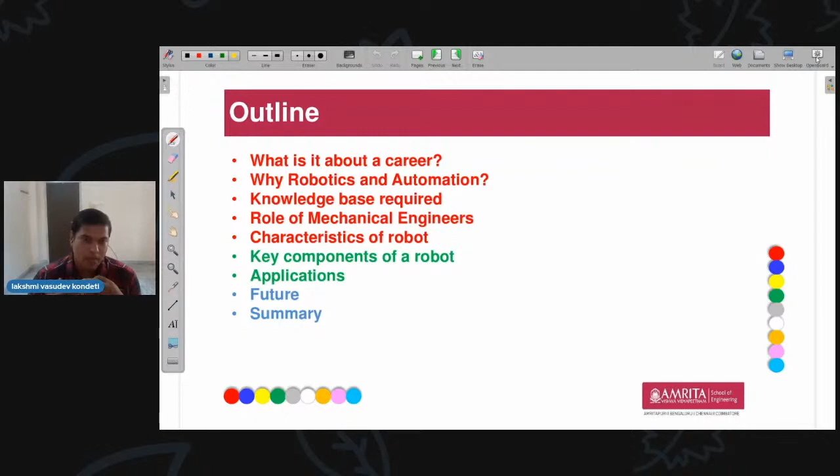So let me outline my presentation for today. I will be talking about what is it about a career, why robotics and automation, knowledge base required for robotics and automation, what is the role of mechanical engineers in this field, followed by the characteristics and some technicalities of robots and their components and applications, etc.

So let me start. What is it about a career? This might be the question for many of you after you finish your 10+2. Career is nothing but the place where you are going to spend 50,000 hours of your life on an average, and the best 20+ years of where things happen for you. So you have to be very careful in choosing your career. The 4 years course or 5 years course, whichever you are preferring at this point of time in your life, will decide the course of your life for the rest of the 20 plus years.

So where you spend during the training also decides it, so you have to be careful in choosing your institutes as well as your courses. Let me start with why automation and robotics is important and why we have to consider this right now. We call this the age of automation, and there are 7 parameters I would like to explain to show why this age of automation is important and why you should consider robotics and automation as one of your career opportunities.

The first thing is the share of jobs with a high potential of automation. If you consider transportation and storage, manufacturing, and wholesale and retail trade, by 2037 there will be a 50% hike of automation happening across these spheres, since there are repetitive jobs that can be automated. By 2037, you will see a sharp change in that field.

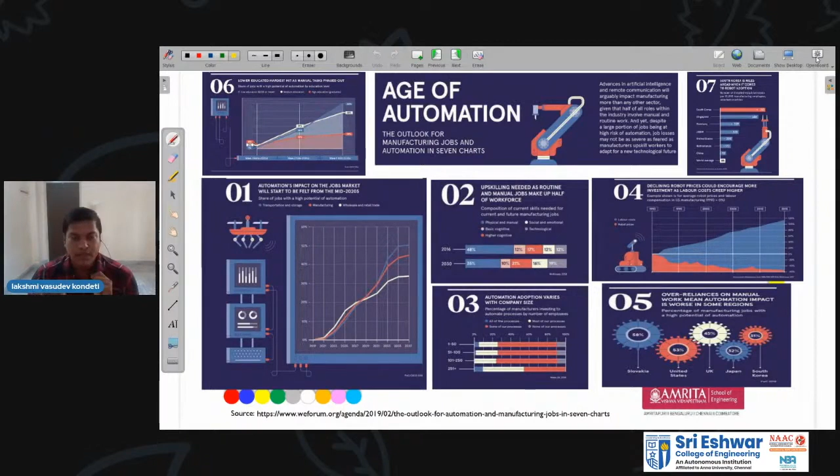So share of jobs with high potential of automation by education level: low level education in 2020 is at 1%, then by 2030 it is going to be around 60%. So low level education people have to upskill their knowledge and improve so that they are in the process of adapting to automation, which is very important by 2030.

Similarly, for medium scale education, it is going to be at 45%, and for high education people it is around 20%. So if you see the implementation of robots in the manufacturing sphere country-wise, for every 10,000 employees, South Korea has already implemented 710 robots.

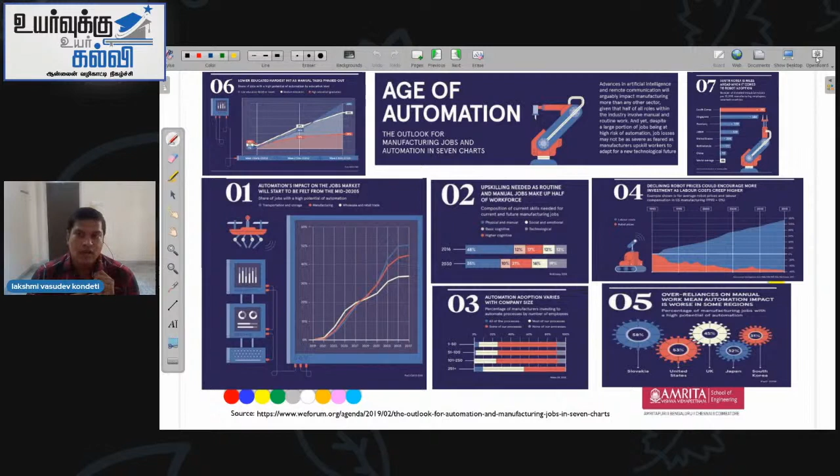Singapore is at 680, approximately Germany is at 380, Japan is at 300, United States at 200, and so on.

So now it is very understandable from these 7 charts. What I would like to communicate is that you are in an age of automation and you have to upskill your talents, and the newer generation needs to look for a better automation and robotics sphere of excellence.

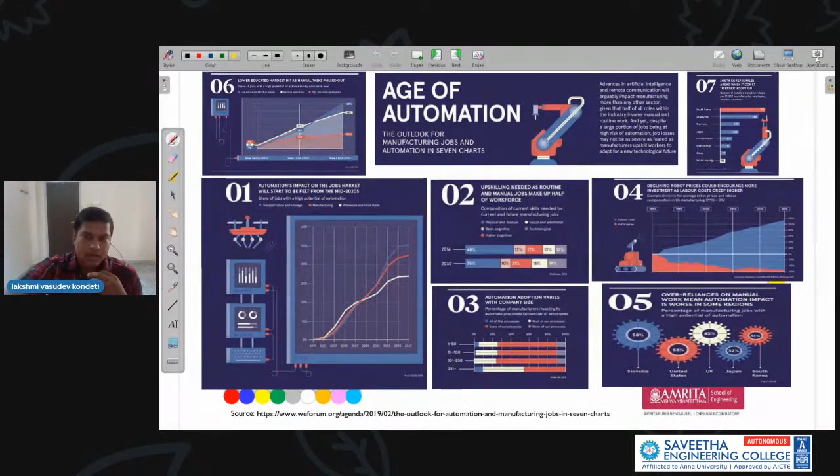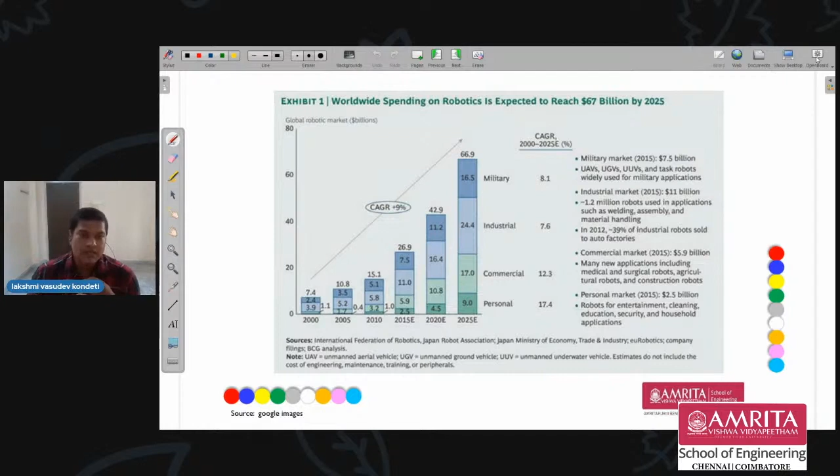If you see the worldwide spending on robotics from 2000 to 2025, the increase is very drastic. The compound annual growth rate from 2000 is at 7.4 billion spending on robotics, whereas in 2025 it is going to be 67 billion, across fields like military, industrial, commercial, and personal.

This commercial and personal aspect is very interesting for us. Why? Because in 2000, no one thought these things could come up. But this COVID pandemic situation has made us understand the need for this type of automation, so that people will not gather too much.

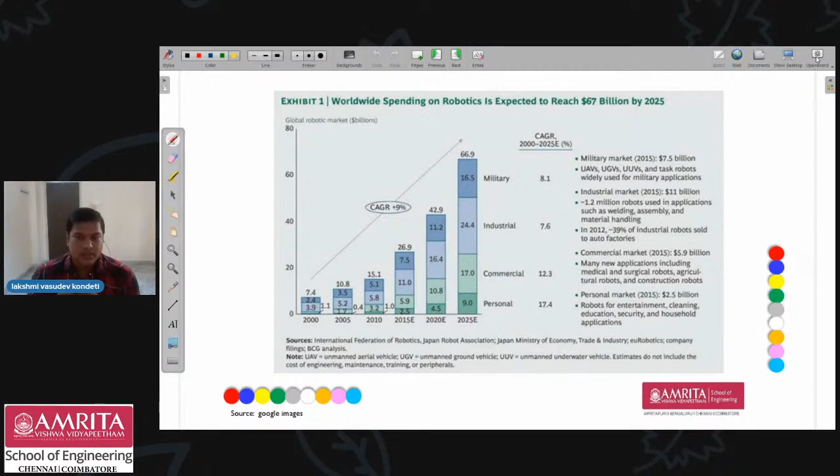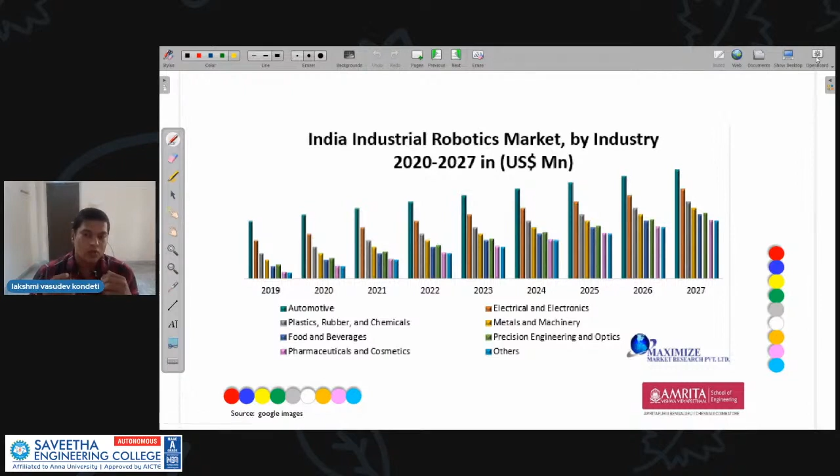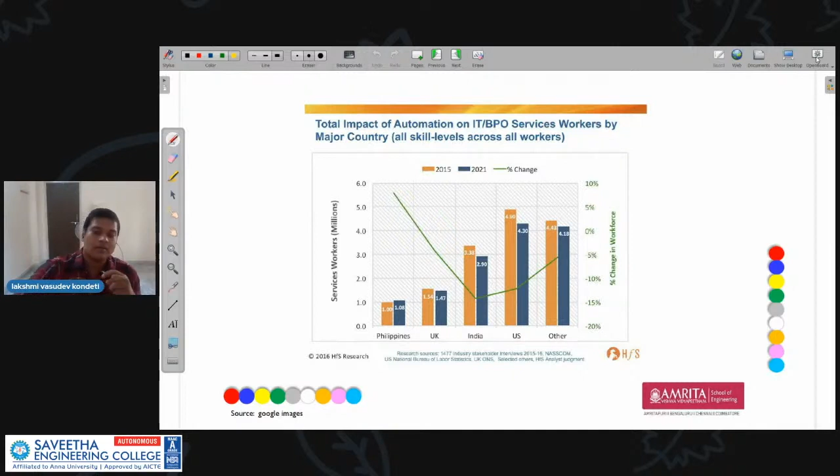Having said that, it is very understandable and very important for us right now to understand that we are in a position, a situation where automation is inevitable, and we need to be ready for that and skilled in that direction.

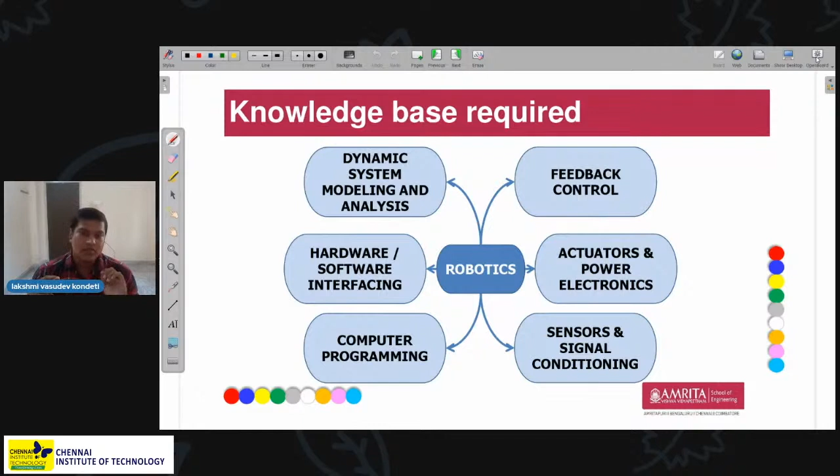So what is the knowledge base required for robotics and automation? Basically the person requires dynamic systems modeling and analysis, feedback control systems - how to control these machines is also very important. Actuators and power electronics, which requires - those are the muscles for the robots. That's one interesting field where electronics comes into picture. Sensors and signal conditioning, computer programming, hardware-software interfacing - all these areas one should be very familiar with in the upcoming years.

So what is the role of mechanical engineer? The role of mechanical engineer covers design of robot structures, joint mechanisms, bearings, heat transfer characteristics, locomotion - all these things are required to be designed, and that design can be done by mechanical engineers. Hence, it is very important that the mechanical engineering sphere is not going to wave off in this.

So for maintenance, even if designing of robots is too much, at least the maintenance part of the robots requires these skills, and hence that particular direction needs to be highly emphasized.

You need to take a course like a 4-year mechanical engineering degree, which is very much essential at this point of time. Robotics mechanical engineers must have a complex understanding of math, science, mechanics, manufacturing materials, and mechatronics. This makes them highly in demand for possessing multidisciplinary skills, because mechanics and mechatronics are completely different disciplines where you need some exposure. Hence you will be in a position if you choose 4-year mechanical engineering as your career.

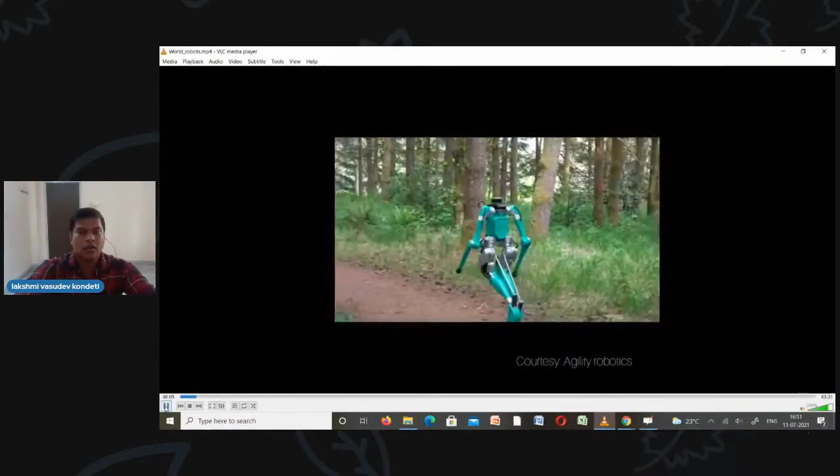Before proceeding further, I just want to show you the current trends of robots. Let me play this video for you. I hope it is visible.

Sir, sorry for the interruption. Dr. Vasudev, your voice is breaking, participants are unable to hear you, sir. I think you need to hold it and constantly hold and talk. Okay, okay ma'am, sure, sure. If you leave it, your voice is breaking, they are unable to hear anything. Please. Okay, thank you, sir. Thank you, ma'am, thank you very much.

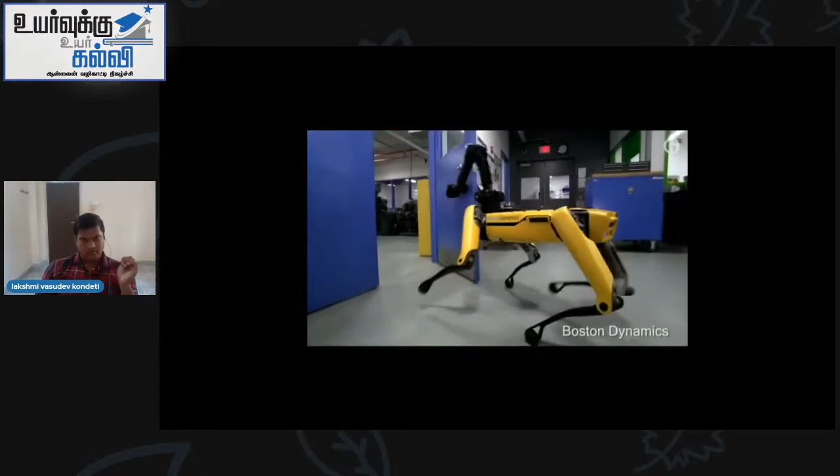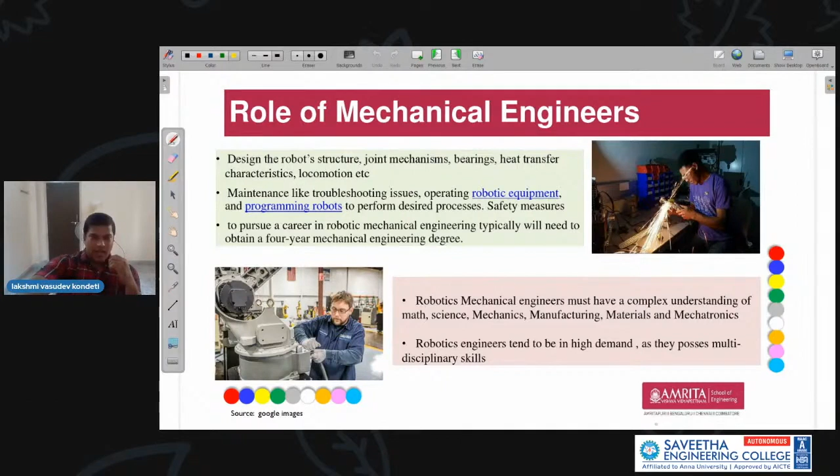It's terrifying, it's terrifying to see that they are even coordinating with each other in the last part of the video. So these are all smart robots which are helping the humans in one or the other way.

Let me go into small details of robots so that you can understand. The robot always needs to sense, needs to move, and needs energy to consume. To use all these things in an optimum way, it needs some intelligence.

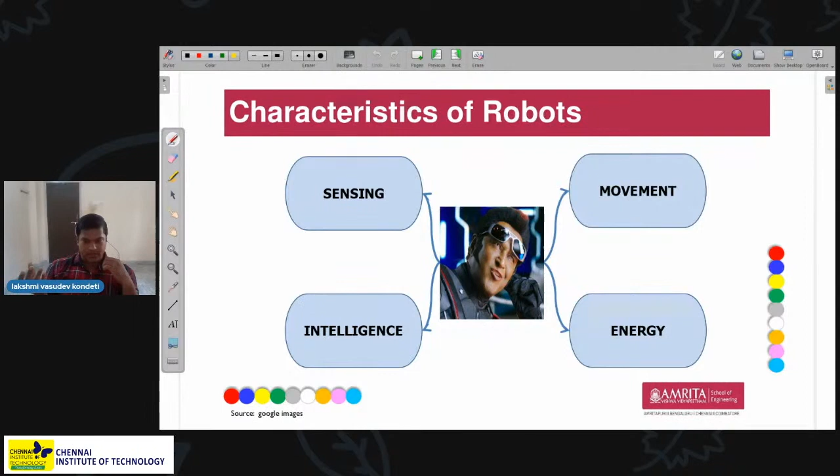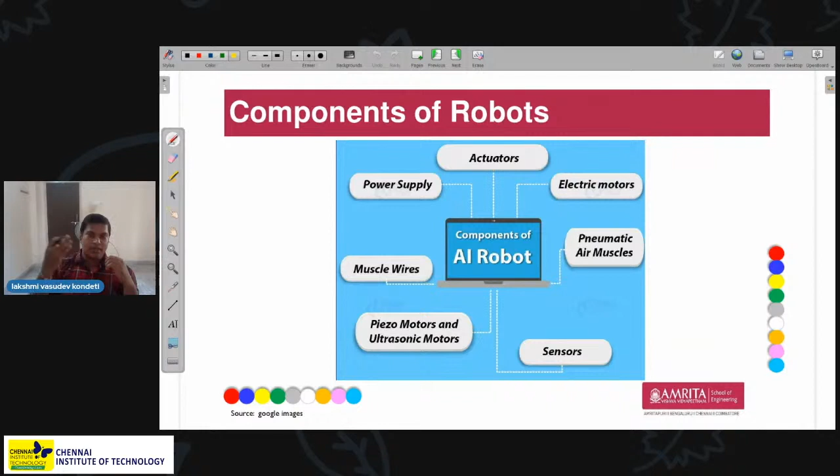So the components of robots are: it is a machine with actuators, electric motors, pneumatic air muscles, sensors, and a power supply unit. And for intelligence, it needs some interfacing with hardware and software.

If you want to differentiate in a very basic manner, we can widely differentiate robots into two categories. One is the fixed one, which cannot move from one location to another; its base is fixed. Whereas the other one is mobile, it can use wheels or legs to move from one location to another.

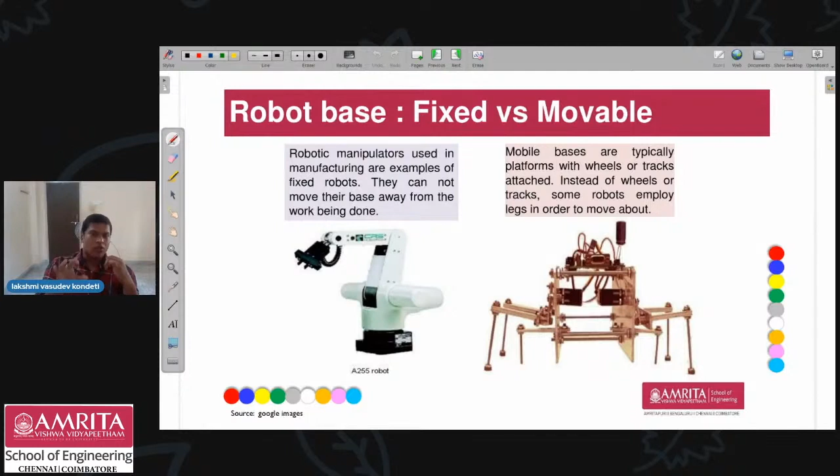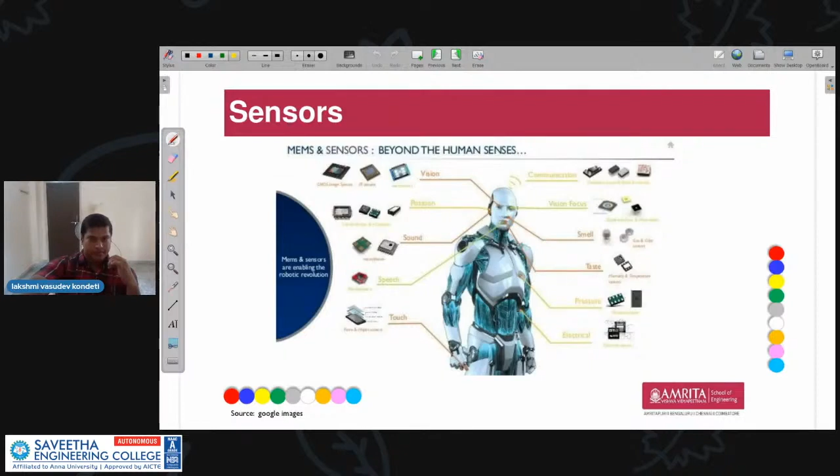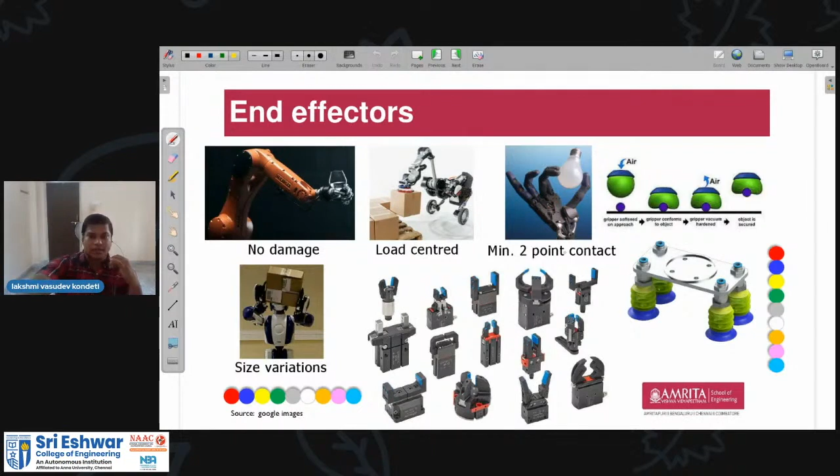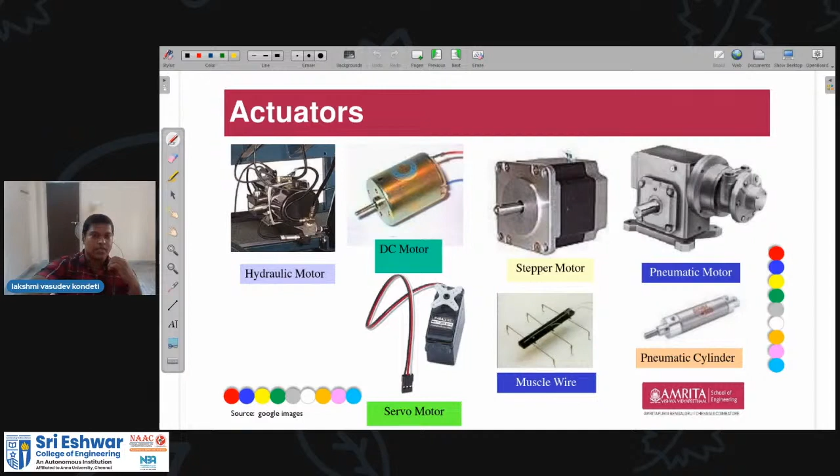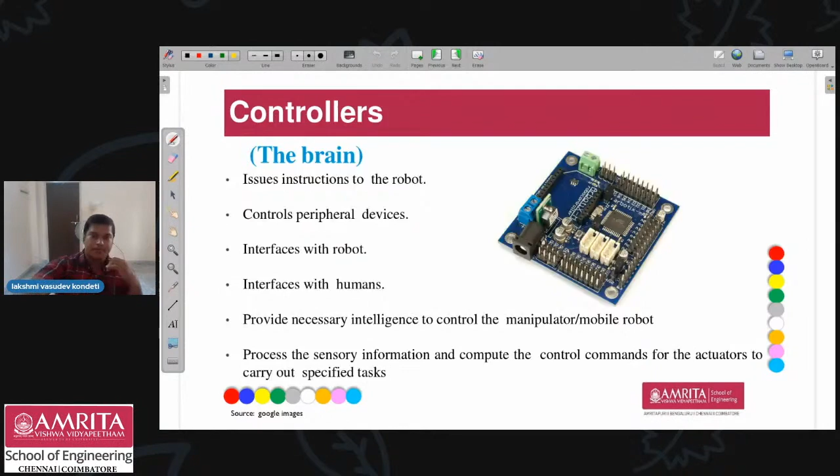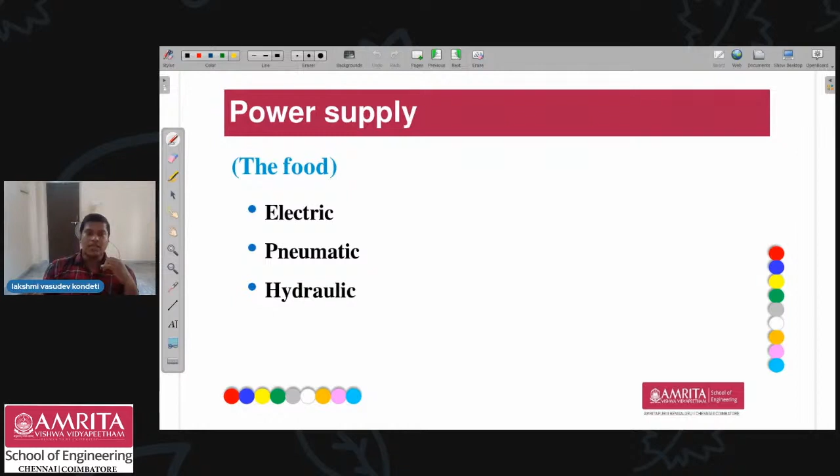The power supply, the food for the robot, is nothing but electricity, air, or compressed oil or water, whatever it is. These are the three ways right now we are supplying power to the robots.

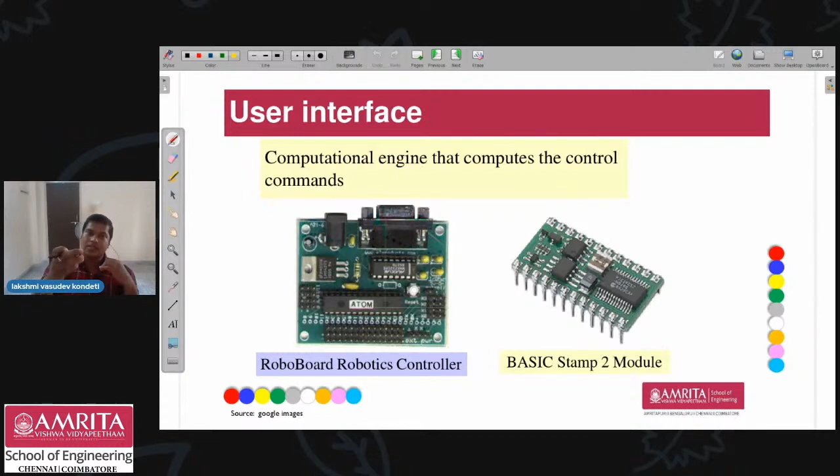Interface: how that interface control is happening is that information is received from the sensor and then it is processed. After that, it has to take necessary action. For this action, these type of boards are required to be installed on the robot.

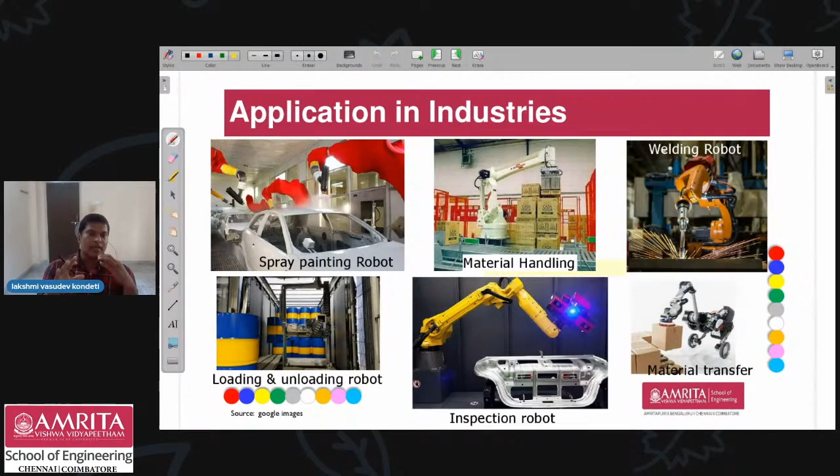Some applications in industry include spray painting robots, material handling robots, welding robots, loading and unloading, inspection, and material transfer. These are all repetitive and unidirectional in nature, hence these tasks can be automated, and robots can help us automate these processes in industry.

In agriculture, you need to lay seeds, moving in a single track and placing them equidistant. Sometimes you need to spray fertilizers, spray water, or pluck fruits without damaging the plant. Sometimes you need to check for rodents in the field. All these things are repetitive in nature and can be automated, and this is already being done in other countries as well as in India.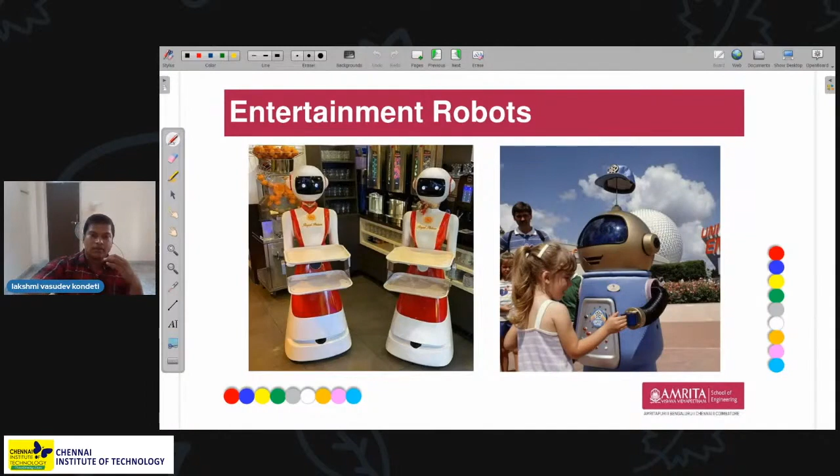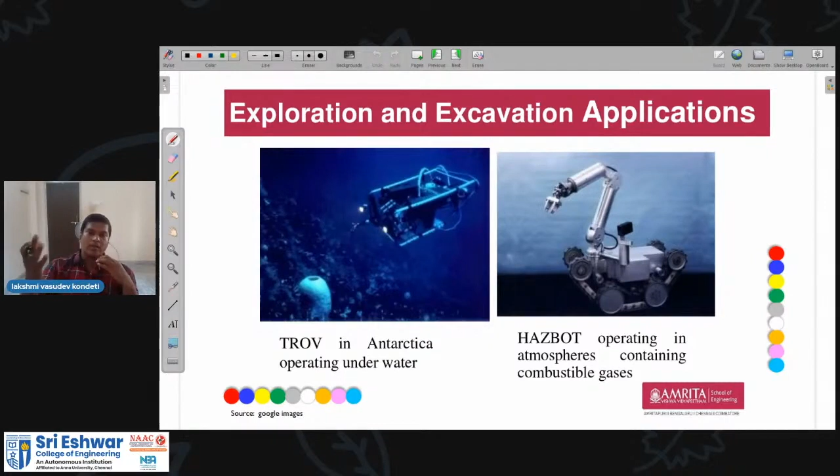For exploration and excavation applications, underwater and in space, we use robots. In Mars, the Mars rover is there. Many examples exist where the atmosphere is hazardous for humans, so we can operate a robot, get the information, and then enter with a peaceful mind.

In healthcare, robotic surgeries are very famous. Even at Amrita hospital in Kochi, they have performed more than 6,000 operations already using robotic surgery with surgical robots.

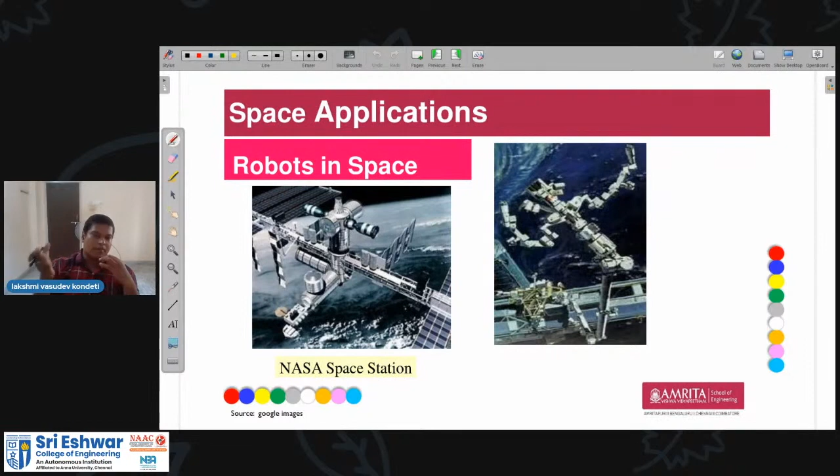In space applications, robots are used at NASA space stations and even in Mars, as I already mentioned, the Mars rover is also a robot.

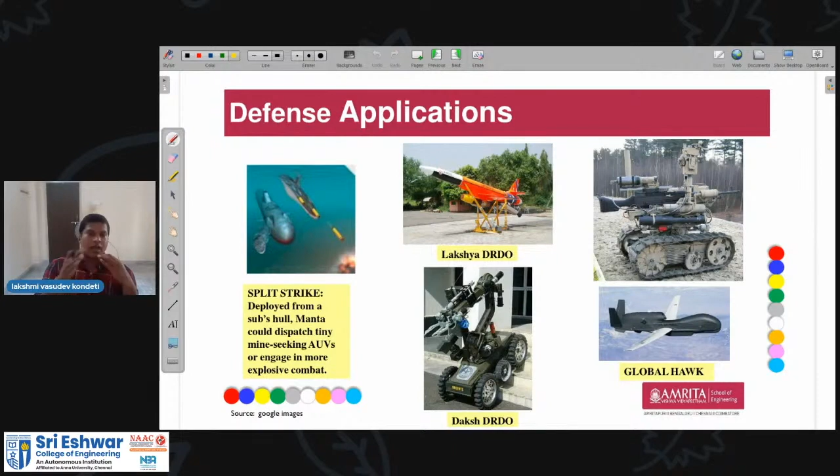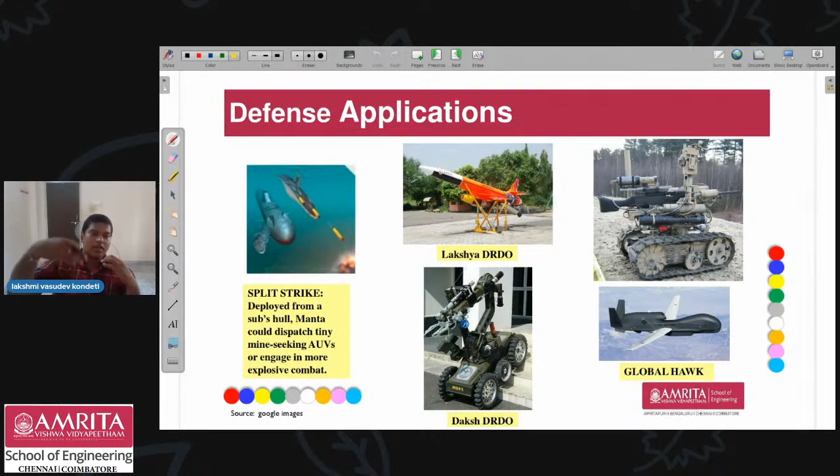In defense, if you see India, almost every variety of vehicle is available - underwater, on ground, and in air. Lakshya, made by DRDO, Daksh also made by DRDO. Global Hawk is one aerial vehicle not made by India, but done in the US. There are also some torpedo-launching underwater vehicles.

Bio-inspired robots: you can see here a reptile kind of motion being taken. Then you have some modeled on insects, dogs, and humans.

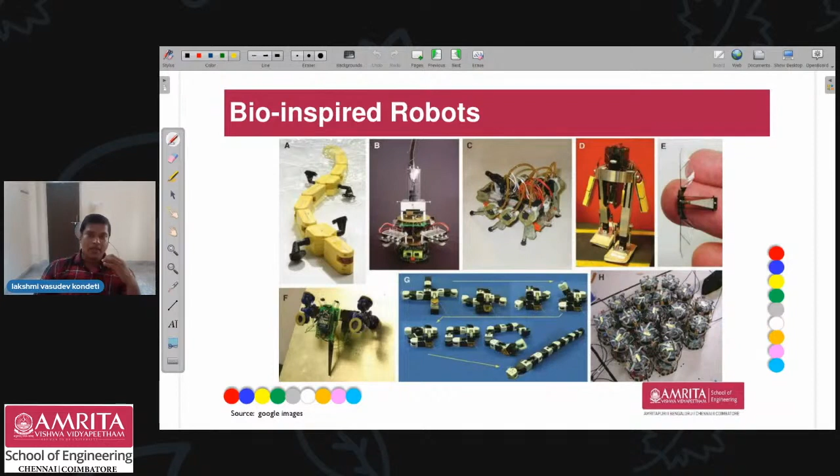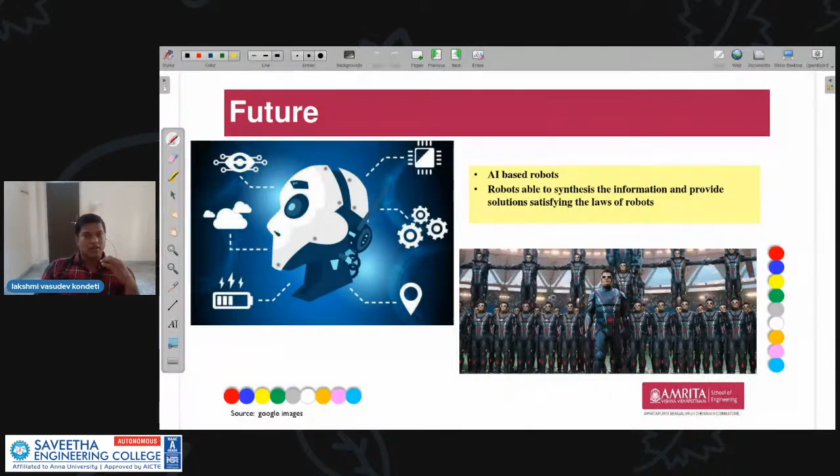So what is the future? In my opinion, it will be AI-based robots, robots able to synthesize the information which we provide. Satisfying the laws of robotics is also very much important, and it is supposed to be done.

With that, to summarize my talk, I have concluded what a career in robotics is about, why you should choose robotics and automation as a career, what knowledge base is required, the role of mechanical engineers, why mechanical engineering should be chosen right now, what future progression looks like, characteristics of a robot, key components of a robot, and the applications we have seen.

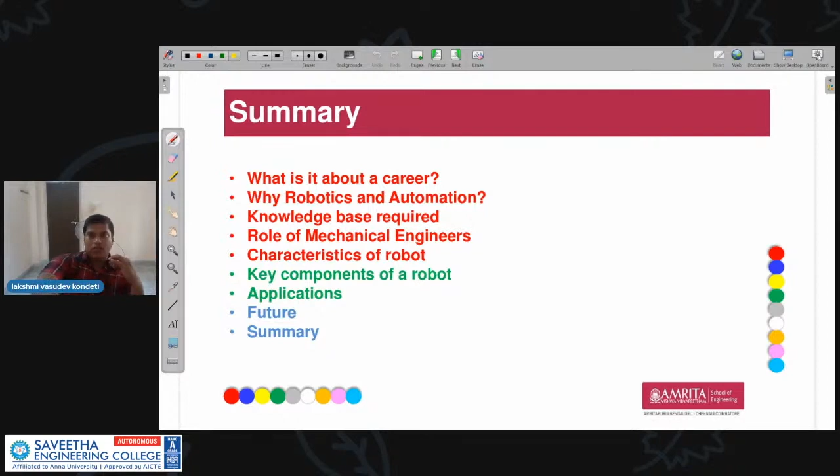Before closing my talk, I just want to play one more video showing Amrita's excellence in doing robotics and dealing with robots. A small video.

The automation robots in our labs - we are proudly presenting the efforts of our students here. It is a humanoid robot which is performing the Surya Namaskar in yoga.

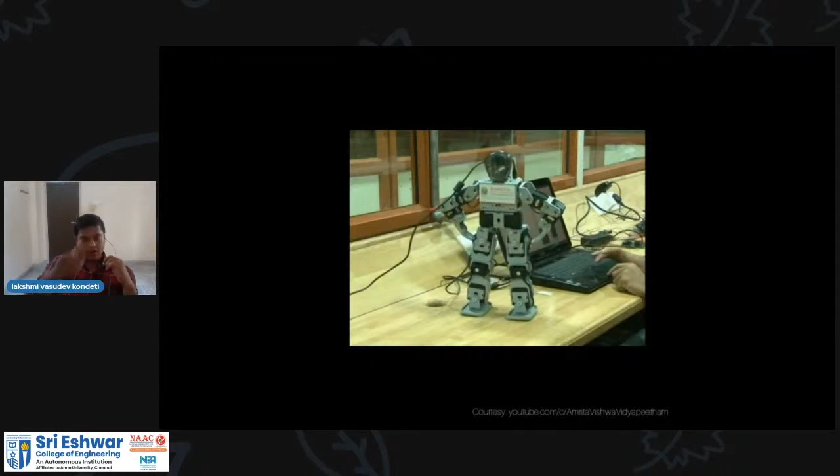Then we are having this robotic knee surgery performed using Stryker.

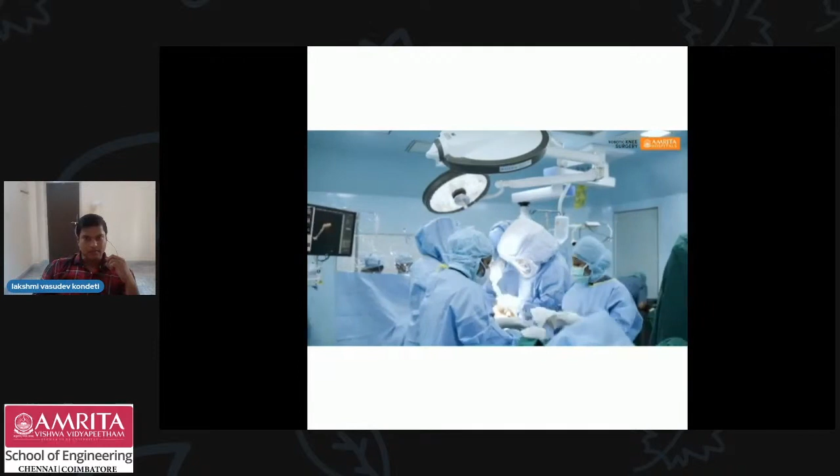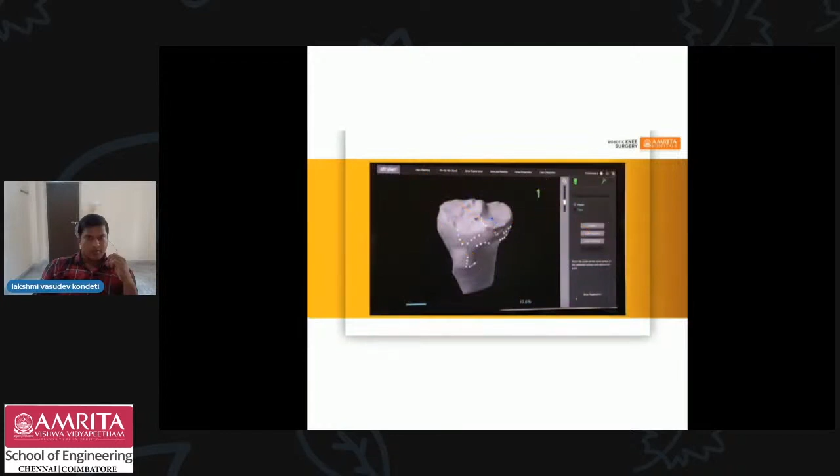The 3D model and 3D modeling of that, with 3D printing options, we made it on our campus.

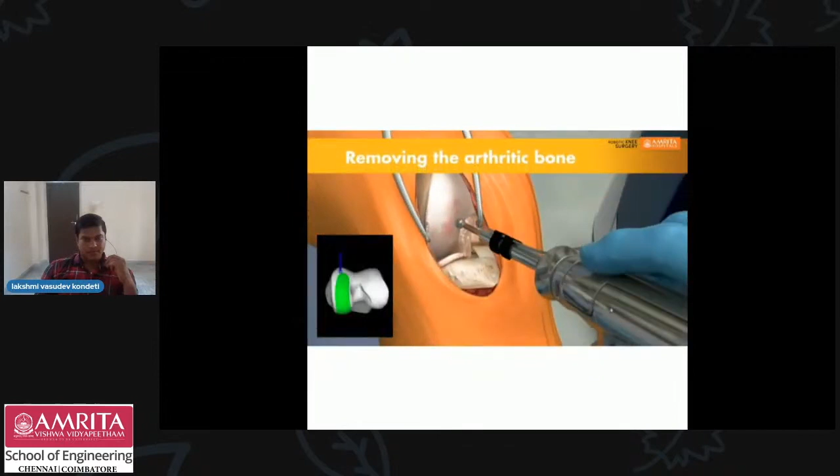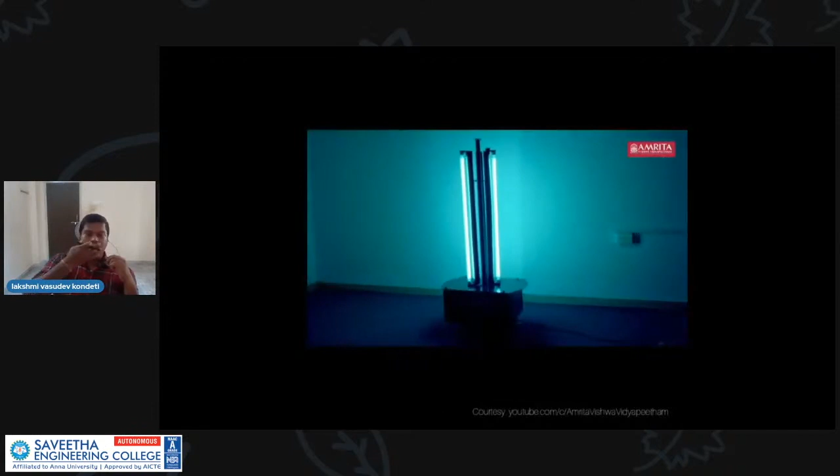This is an ultraviolet robot to sanitize the surroundings.

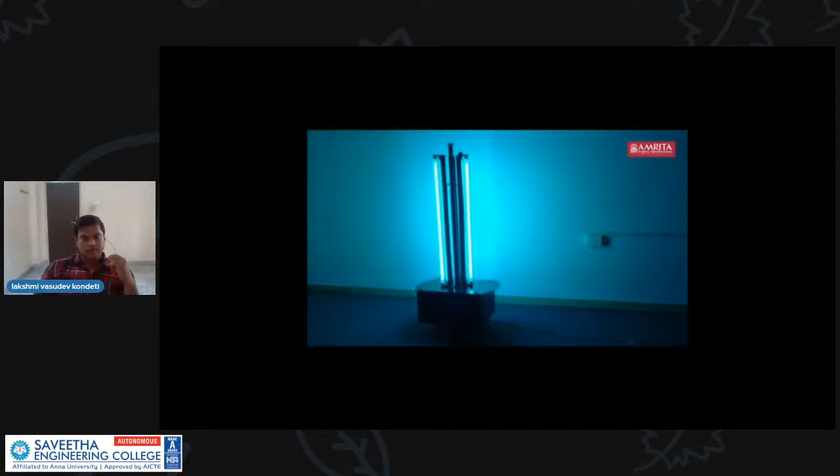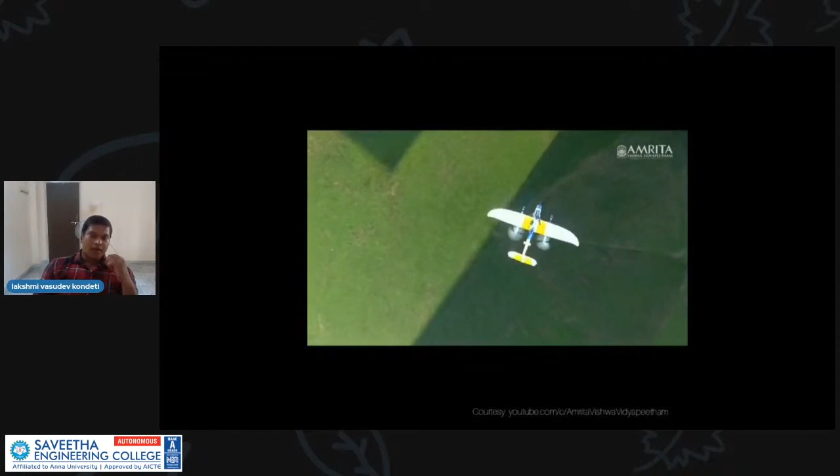This is the air vehicle which can be used to spray fertilizers or water, or to find fire in forests - kind of applications. It is also fit for spraying fertilizers for plants and supplying food or medical supplies to people in remote areas.

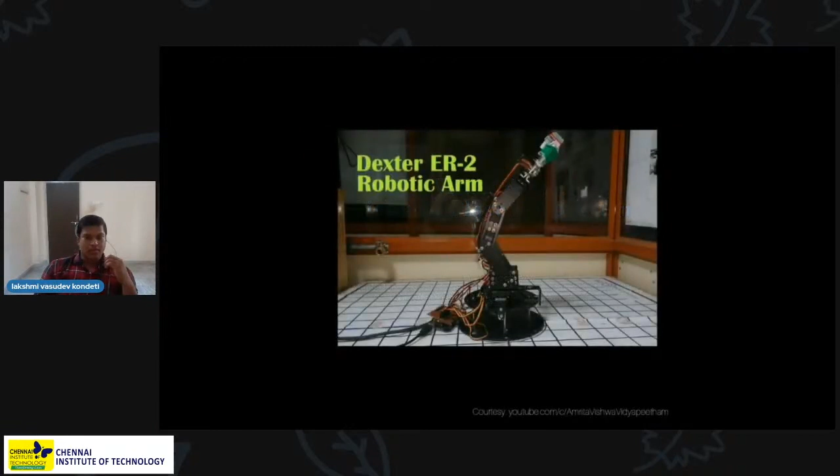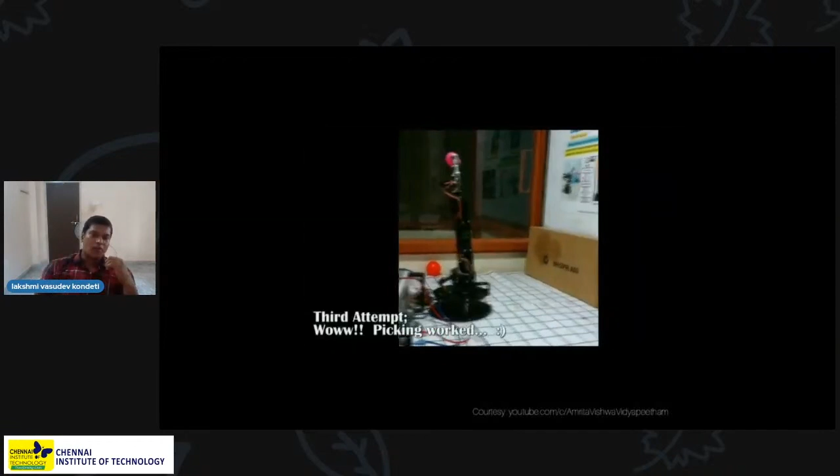At different stages, how we have developed this robot has been explained on screen. Successfully, on the third attempt, it is able to take the ball from this position and place it in the required position. This is the one we have developed on our Kollam campus, Amritapuri.

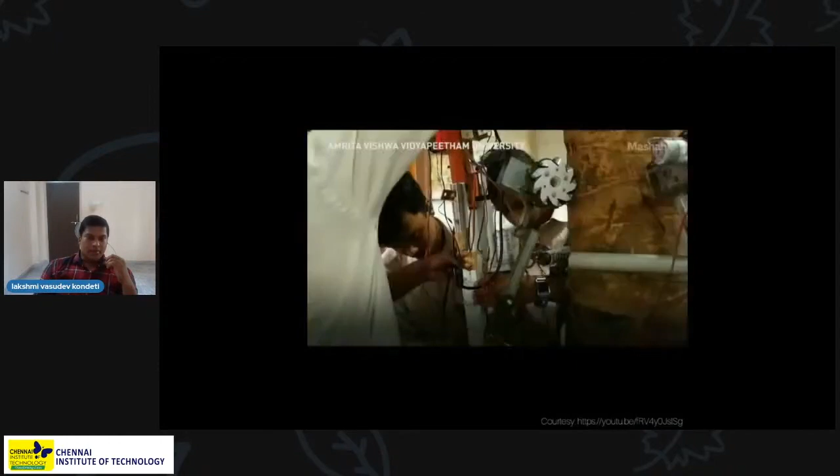It is used to pick coconuts from the coconut tree.

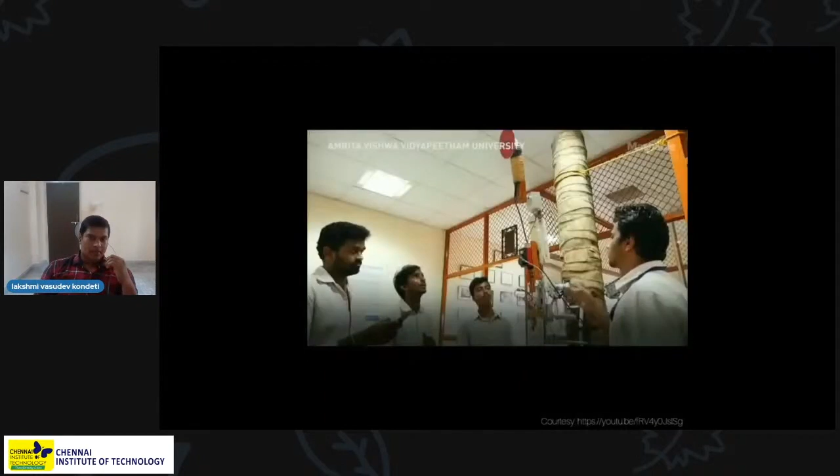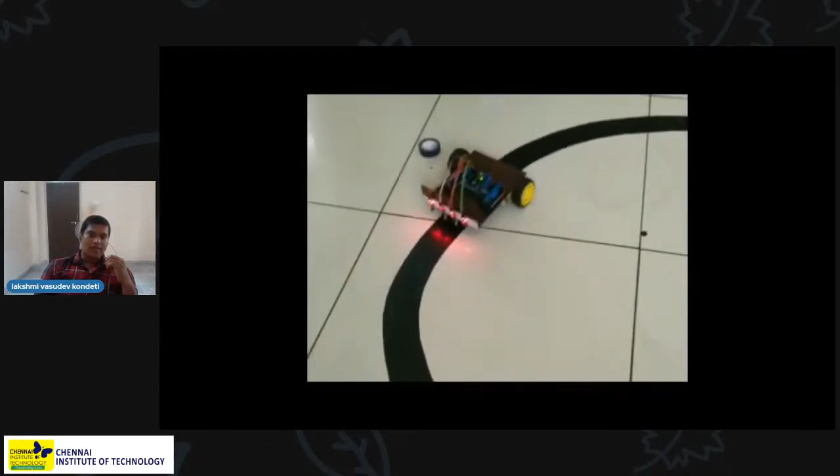It is part of the Live-in-Labs program of our college, which was fascinating in helping us understand the real, realistic problems occurring in villages, and we try to show them some solutions for that.

So with that, I think I can conclude my talk. If any questions are there, they are welcome.